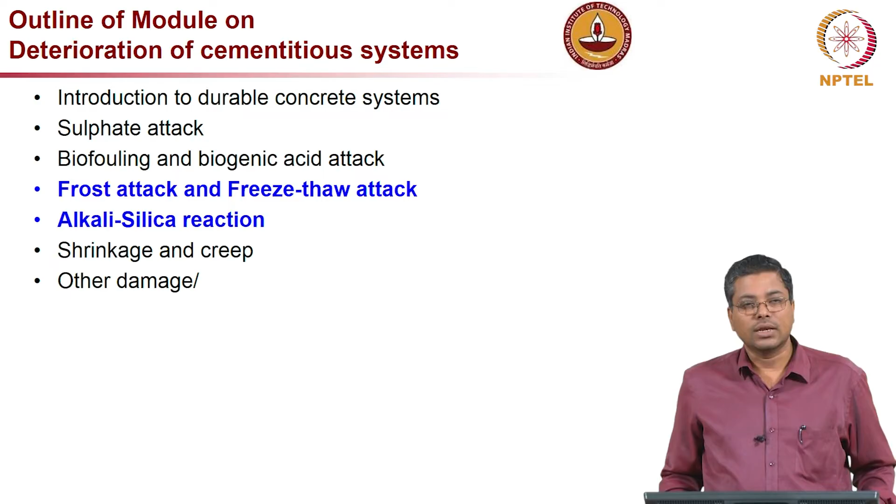Hi, this is lecture 7, which is actually the second lecture in the module on deterioration of cementitious systems. In lecture 6, we covered introduction for durable concrete systems, and then also sulphate attack and acid attack. In this lecture, we will cover frost attack and freeze-thaw attack, and also alkali-silica reaction in concrete systems.

To talk about frost attack, first we need to know where this actually happens. We have a lot of regions in our country where the temperature could be less than 4 degrees Celsius or ambient temperature. We define that as cold climate, and as you can see in this map, this blue region represents areas where cold climate is experienced. Even in other parts of the country you can see some hill stations, etc., where the temperature could be very low or can be defined as cold climate.

If you talk about the northern border, you even have places where the temperature during the night could be minus 35 degrees or even less than that. Eventually what happens is for construction purposes we get only a few months per year, like 2 to 3 months, to actually work comfortably in an outdoor environment.

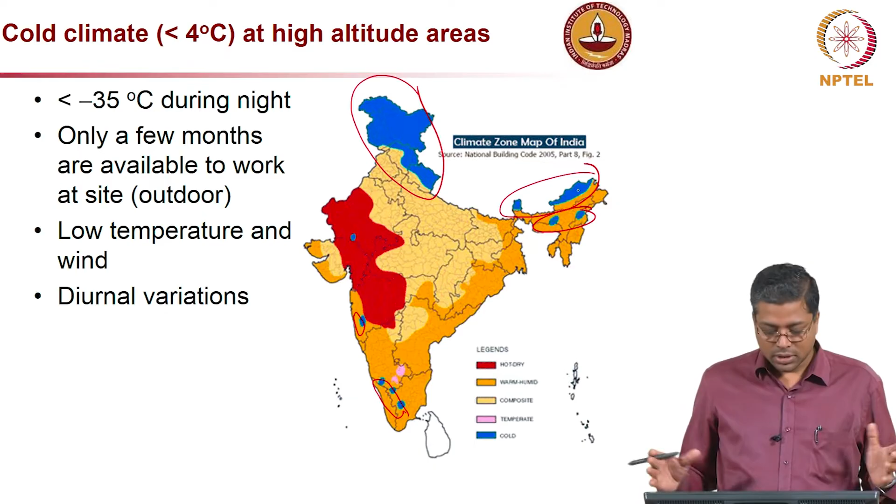And it's not only temperature, we also have to consider the wind chill factor. So these, and also you might have diurnal variations, that is daily variation of temperature. All these have to be considered when we talk about good quality concreting, and it is not very easy to construct during cold climate, because we ourselves won't feel much comfortable in that climate.

But we definitely have a need for good quality concreting in places like what you see on the screen, especially border regions, very high altitude regions with very difficult to reach terrains. How do we do good concreting in such cases, which is very important for our defense systems, because we might have bunkers and other facilities which need to be of good quality.

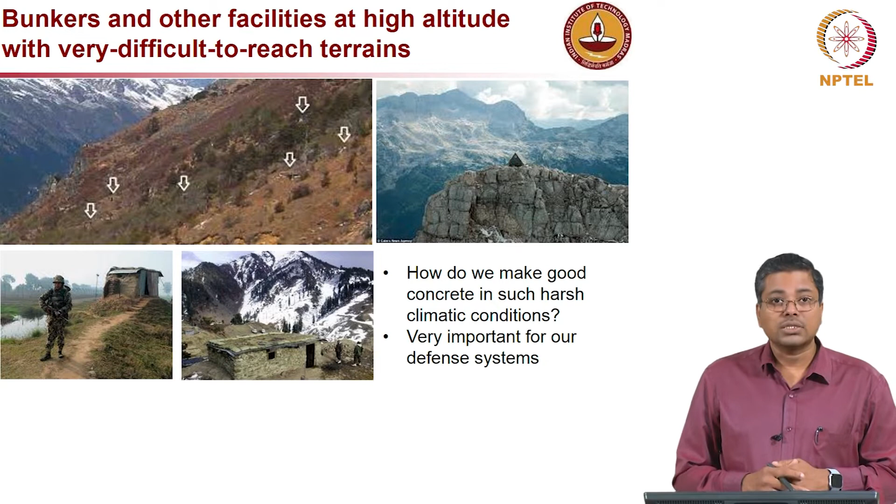So in this lecture we will focus on how to do good concreting in such harsh and very difficult to reach environments.

This picture shows a completely snow-capped region, and toward the center of the picture you see a black circle, where there is actually a home being built. I put this example here because that particular building took about 8 years to construct because of the harsh weather conditions. So it's very important to consider good quality construction practices, so that we can reduce the duration of construction from 8 years to maybe a couple of years.

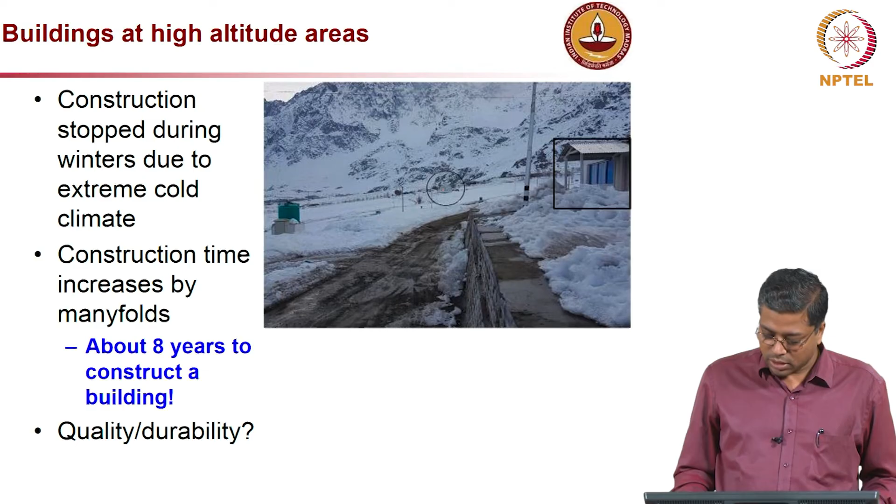We have to really think about this, and also another point is, even if we take 8 years to construct, how long will that particular facility last, can it be durable. All that also has to be considered, because first of all, in these conditions it is very difficult to construct. So our objective should be that when we do it, it should be of good quality, so that we do not have to go and repair in these difficult terrains and harsh climatic conditions.

Now this shows pictures of transportation systems, you have a bridge and an asphalt road which is heavily damaged because of moisture attack, and also poor quality asphalt, which leads to severe damage when vehicles run over them.

On the right side you have an image showing a wheel with metallic chains, which are sometimes necessary to ride these vehicles in a very harsh climate. What these chains do is, as the wheel rolls, the chain breaks the ice and makes it easy for driving on ice-capped pavements.

The picture on the bottom left shows, toward the center, a highway in that region, and all these have to be of good quality. How do we really achieve that good quality and long lasting performance?

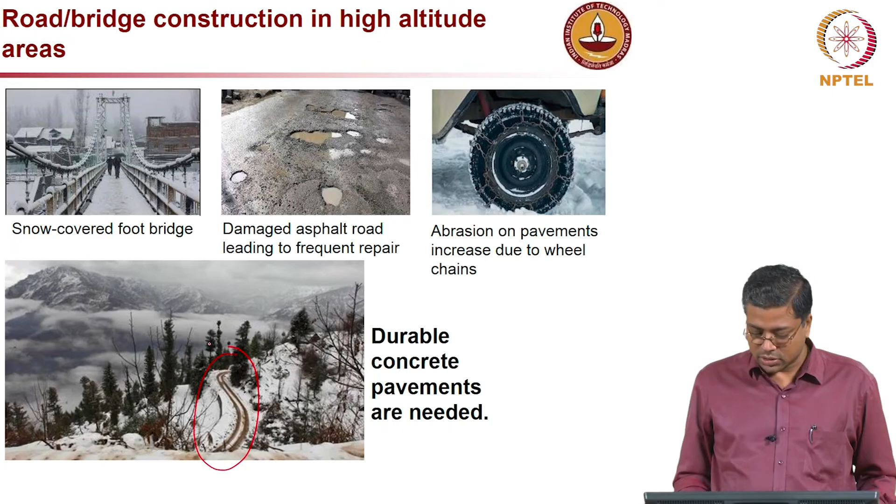Let me emphasize the point, construction itself is very difficult in these locations, and so if you do not pay attention to durability, the constructed facilities may not really last long. So we must ensure that the quality of construction is also very high, and once constructed it should last as long as possible.

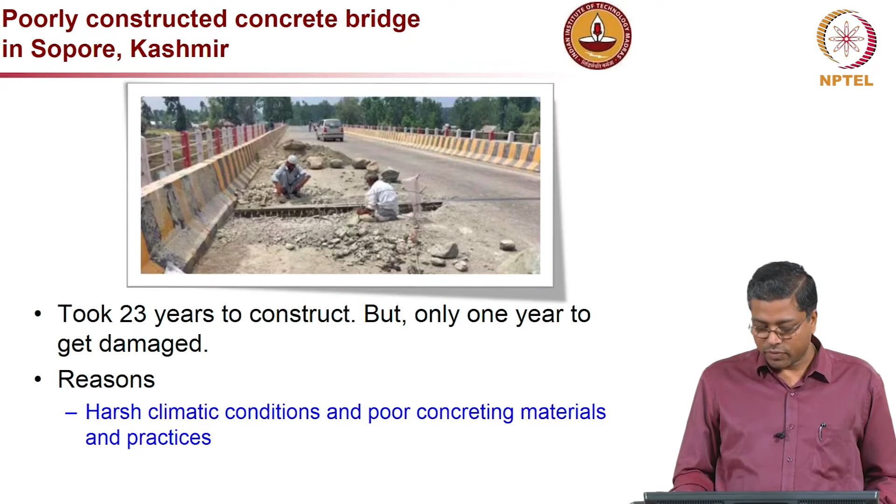Now, what are the reasons? Mainly harsh climatic conditions and poor concreting materials and practices. This is not acceptable, especially when we talk about difficult to reach terrains and harsh climatic conditions. The objective of concreting in cold weather should be that you do it properly, so that the structure does not need a lot of repair.

But we are having a lot of structures where repair is needed. Let us look at the remaining slides. I am going to talk about the various mechanisms by which concrete in cold weather conditions faces difficulties.

Now, in the fresh state or early state of concreting, there are 3 parameters which are important to consider. The concrete should set very fast or as early as possible, the early age compressive strength has to reach a reasonable level, typically 3.5 MPa, and thermal crack resistance is also very important.

All these can get affected when the temperature is very cold, and in the hardened state also compressive strength may not reach the required level if the temperature is very cold and concreting is not done with adequate measures. Other things which can happen in the long term are pop-outs, D-cracking, internal cracking, scaling, etc.

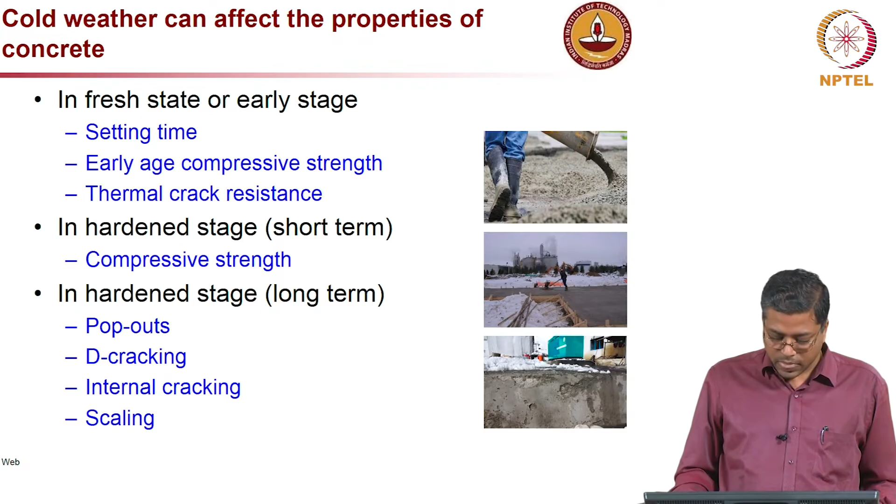We will cover all these in the upcoming slides. What are these different mechanisms? First, when we talk about cold weather or frost attack, there is ice formation which happens in concrete.

Where is this water which is used for mixing the concrete? If the temperature is very low, it will become ice, and as we know, ice formation means an increase in volume, about 9%, which leads to significant expansive stresses in the concrete. The first picture shows that 9% increase, and the second picture shows a system where there is not enough space available inside the concrete, which will eventually lead to cracking because of this ice formation.

The third picture shows how we can control this cracking scenario using the black circles, which are the air voids introduced, or entrained air voids, not entrapped but entrained air voids. In other words, air is added as an ingredient in concrete, and we typically use about 5 to 6% air by using some chemical admixtures, air entraining admixtures.

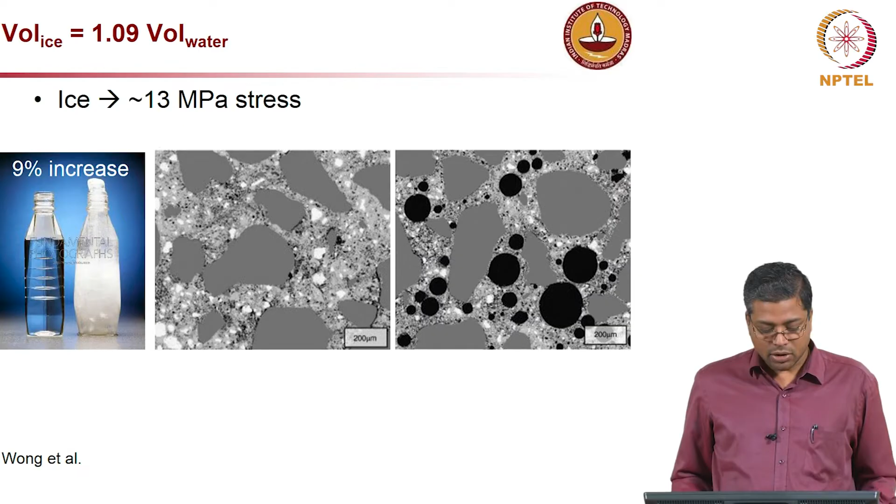So the idea is these air voids will help provide space for ice formation without inducing any expansive stresses. This is the main idea of how to handle cold weather concreting. Let us see some more details of this frost attack, which happens mainly at early ages.

Ice lenses are formed, or ice is formed at the surface of the concrete first, and as it expands, like you see in the picture on the top right, this wedge-like ice is formed, and as it expands it pushes into the interior concrete, leading to cracking. Essentially they end up fracturing the concrete or leading to cracking, and this can happen in the fresh state itself.

Also in the fresh state, when this happens, the mixing water is actually consumed, it becomes ice, so sufficient water is probably not available for the hydration reaction. What it ends up in is an irreparable loss of strength, which is very important, because if you do not get that strength, it means irreparable loss.

What it means is you cannot really gain it at a later stage, and the strength can decrease by about 50% if the concrete is frozen within the first few hours of placement, or before it attains 3.5 MPa strength. This 3.5 MPa requirement is given in most codes. So in cold weather concreting, we have to first ensure that the concrete gets 3.5 MPa, then protect that concrete further by ensuring adequate moisture and temperature. We will cover that later, but remember this number 3.5 MPa, it is very important.

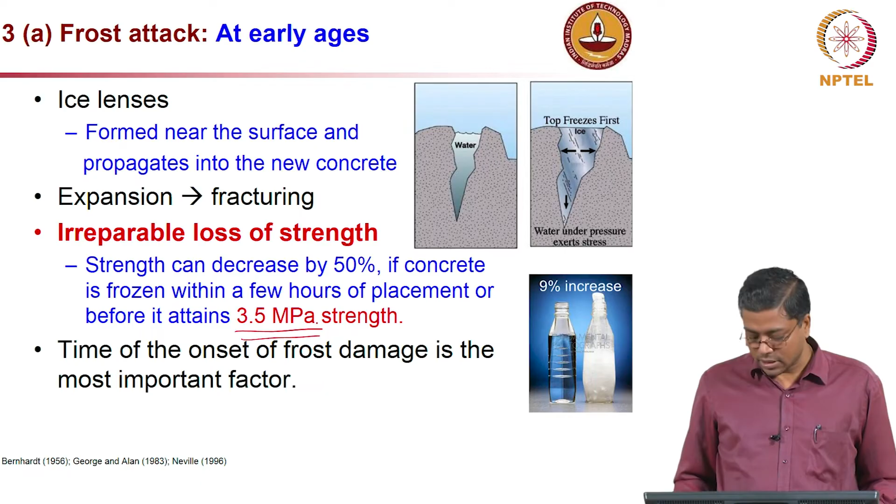Now, the time of onset of frost damage is also most important. That means if the frost damage happens after 3.5 MPa strength is attained, then we can still manage to get sufficient strength later.

Now let us look at delay in the early strength gain and reduction in the later age strength. This graph shows strength gain of about 40 MPa in 28 days at normal conditions. But the same concrete, when the ambient temperature is minus 4 degrees Celsius, gains only about 10 MPa strength in 28 days. So there is significant reduction in the strength.

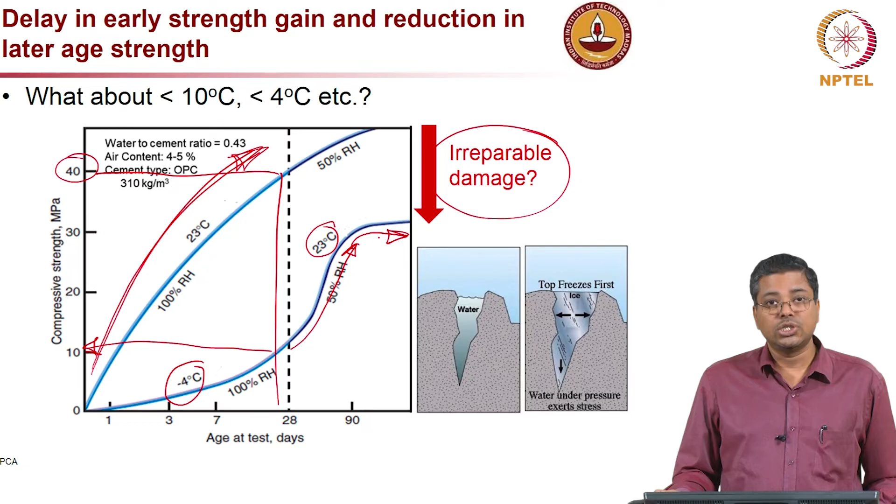Another important thing to notice is, after that, when the temperature is maintained at about 23 degrees Celsius, it still is not able to reach the strength of the other concrete which was exposed to 23 degrees Celsius from the very beginning. So there is a significant reduction in strength, which I am going to call irreparable damage. That strength you cannot gain, because after about 90 days the curve is almost flat, so there is no significant strength gain after that. You have an irreparable damage when talking about very low temperature. This is very important, and we will see in future slides how to take care of these issues in cold climate.

Now, ice formation in early stages, besides affecting strength, can also affect durability of concrete. If you look at this graph, the solid curve is the amount of ice formation, and the dashed curve indicates the permeability of the cement paste, or concrete. You can see that the permeability decreases as more and more ice is formed.

In reality, once this mechanism is over, if there is an increase in temperature later, the ice contained within the concrete will melt, become water, and that water might also evaporate at a later time. You will end up having more pores or voids, which leads to higher permeability, and definitely reduced durability in such cases. So this frost attack is very important to consider, not only for strength, but also for durability.

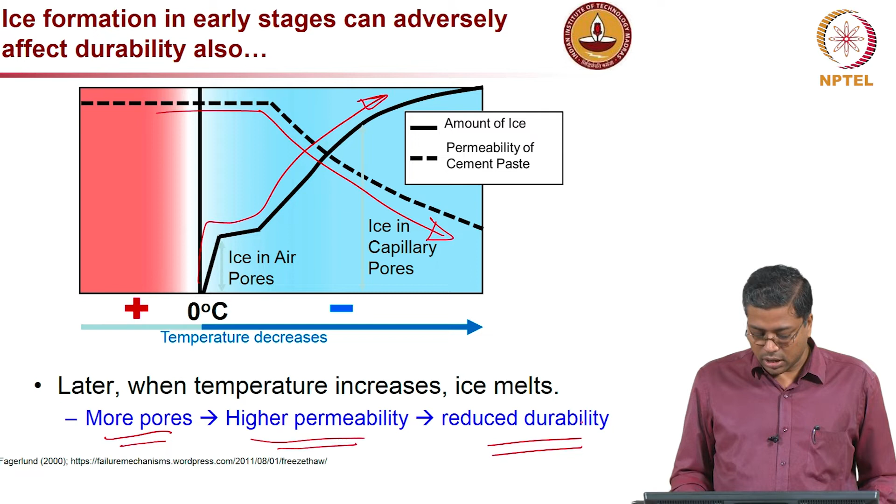Now, another effect is temperature differential induced effect. This schematic shows a mass concrete cross section of a concrete column. When the formwork is removed, the heat generated in the peripheral region is lost into the immediate cold environment. But at the core of the concrete, you still have reasonably high amount of heat. So there is a thermal differential temperature between the core and the peripheral region of the concrete, and because of this, the concrete will experience significant cracking near the peripheral region. The black areas indicate the cracked region.

The cracking might happen at the peripheral region, and if you have reinforcement near the cover concrete, you might also have corrosion related problems at a later stage. So you do not want the concrete to crack. How do you ensure this does not happen? By making sure the heat generated inside is not lost into the atmosphere. You have to maintain a good formwork and good insulation around the peripheral region, covering the concrete with a good blanket or other measures, which we will talk about later.

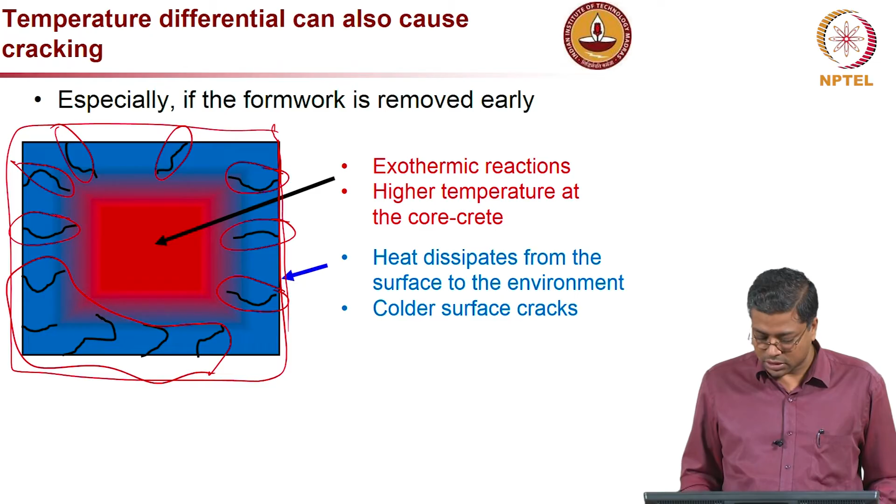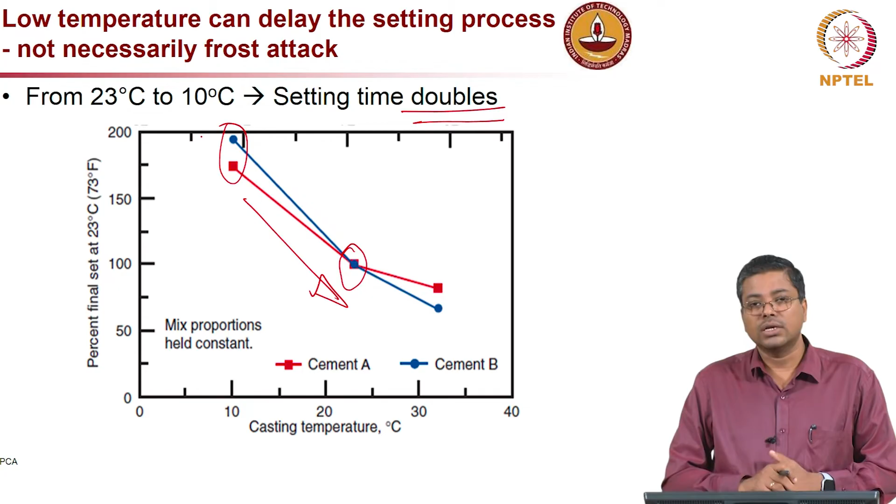Now, talking about a reasonably cold environment, say about 10 degrees Celsius, what happens to the setting time? You can see the setting time almost doubles. There is a 2 times increase in the final set as you go from 23 degrees Celsius to 10 degrees Celsius. This is a significant difference, so you have to consider various measures to ensure the concrete is actually setting fast enough. One way to achieve that is by using finely ground cement.

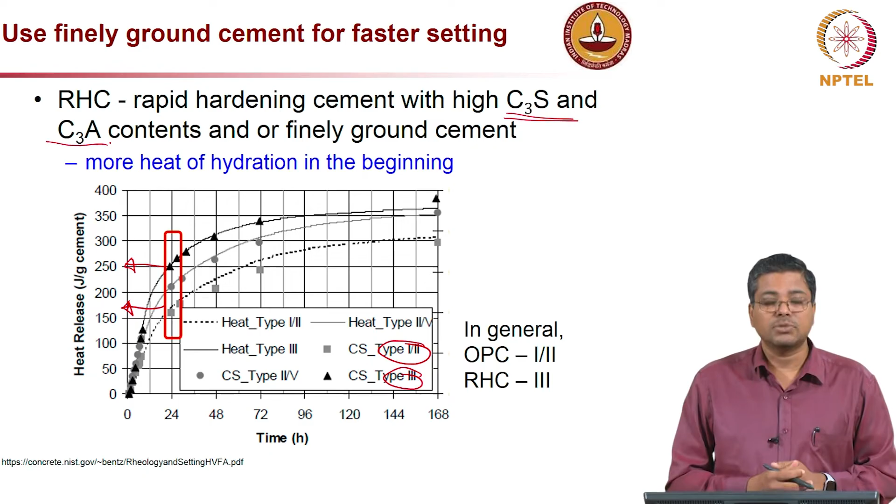This heat is very good or necessary for the hydration of the concrete to get cured better or in an accelerated manner. And also we can use high C3A and high C3S cement, which will actually help in making sure that there are more reactions, especially in the early stages of curing or hydration.

Now, this image or graph shows how the use of this rapid hardening cement can help in increasing the strength gain in the early period. So, let us look at here about 3 to 5 days. If you look at this, you can see that there is about 10 MPa strength gain or increase in strength when you compare OPC to rapid hardening cement.

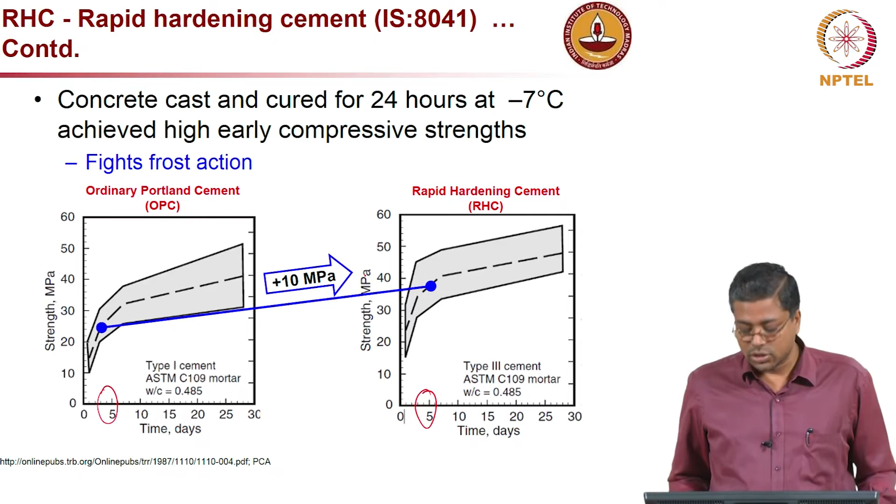So, definitely the type of cement you use matters, and the content, like if the cement has high C3A or C3S, and at the same time if it is finely ground, then definitely you can resolve some of the issues which happen at the early ages of curing. Okay, we also have accelerating admixtures.

Until now we were talking about the cement or the mineral admixtures, and how selection of cement can help in reducing the setting time and gaining early strength. Now let us look at accelerating admixtures, which can help in reducing the setting time and increasing the strength gain, especially at the early age.

And these accelerating admixtures also actually reduce the liquidus temperature, but not significantly, it reduces only by about 2 degrees Celsius. Let us see what this liquidus temperature is. It is the minimum temperature at which all the components of a solution can be in liquid state, and that means below the liquidus temperature the mixture or concrete will be partially or entirely solid.

So, we have to have some admixtures or some way by which we can ensure that the mixing water is available for reaction. I will come to that later, but before getting there, let us see this accelerating admixture. What are the three main categories? They use calcium chloride and accelerators which contain calcium chloride, and also non-chloride accelerators.

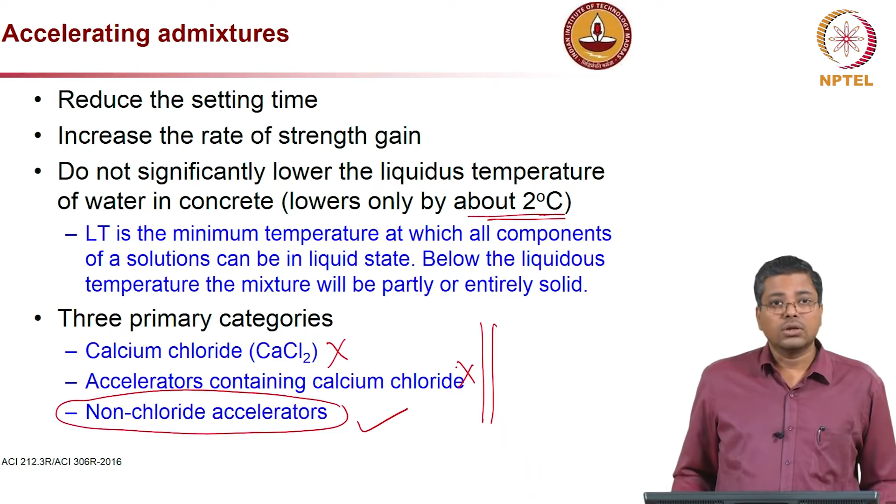So, I would prefer to use this non-chloride accelerator. Probably we may have to avoid the use of calcium chloride and calcium chloride based accelerators, because that might eventually lead to corrosion, which is not a good idea. So, it is better to go for accelerators without any chlorides in them.

Now, there is also another technology where the admixtures contain seeds of CSH, which function like a nucleation point for further reaction to happen and help in setting. So, what you see here is the CSH seeds and then cement grain, and then water, and these are also the CSH and ettringite needles, etc. You will see the needle shaped structure.

So, here the picture on the left side is without the CSH seeds, whereas here this is with CSH seed. Now, this will help in gaining the early strength and reaching 3.5 MPa. Let me correct this, this is M capital PA. So, that 3.5 MPa strength criteria is achieved, especially for cold weather climates. This is very helpful, because these seeds provide the nucleation point for the cement hydration. That is the technology.

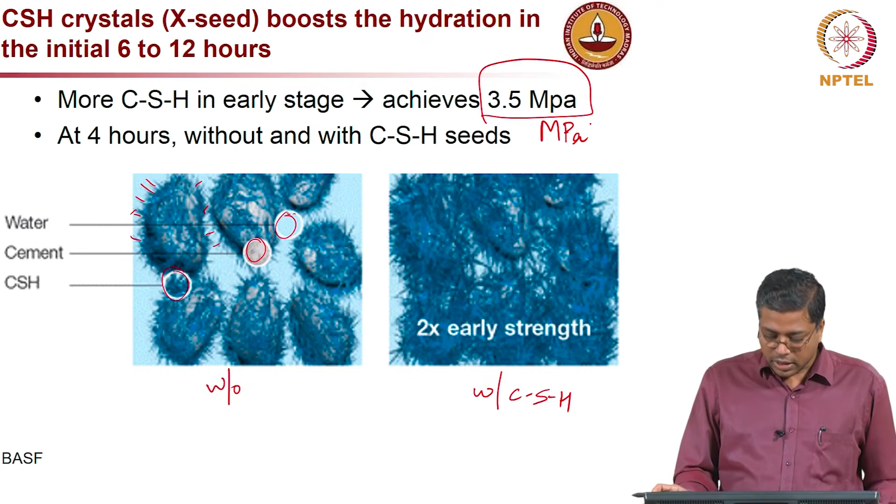And antifreeze admixture is another technology where the addition of these admixtures reduces the freezing point of the mixing water by about 10 degrees Celsius, from 0 it might go to -10. Because of that reduction you have more water available for the hydration reaction.

And you can see in this graph, when you have a control case where there is no antifreeze admixture, and the red one with antifreeze, you can see there is a drop from 0 to about -10. So that is the reduction in the freezing point of the two systems without and with antifreeze admixtures. So essentially what it means is, during cold weather or cold climatic conditions, you can have more time for construction. That means we can pick a time, and even if the temperature is down to -10, you can still do concreting with this admixture.

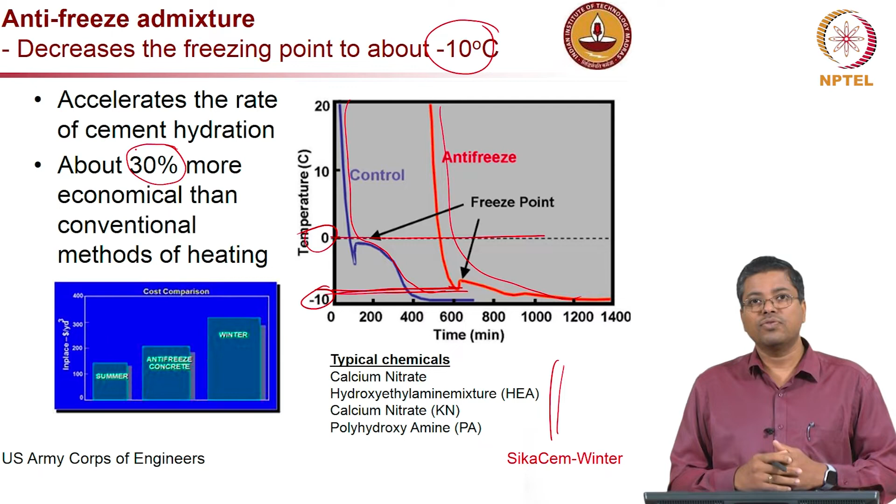These are some examples of chemical families which are used, and people have done studies on how economical this methodology of using chemical admixtures is for mixing concrete. Studies show there can be about 30% savings instead of going for heating or other conventional methods of cold weather concreting. So just use a chemical which is added to the concrete and which can reduce the freezing point of the mixing water. That is the idea here.

Now, how should concrete be protected until the specified strength of 3.5 MPa is attained? That means in the very early stages of concreting. First, we have to ensure that sufficient moisture is available. How do we ensure that? By preventing evaporation of moisture from concrete, because when you mix concrete based on your water cement ratio, you already have the amount of water required for hydration. All we need to do is prevent it from getting out of the concrete, that is, prevent evaporation.

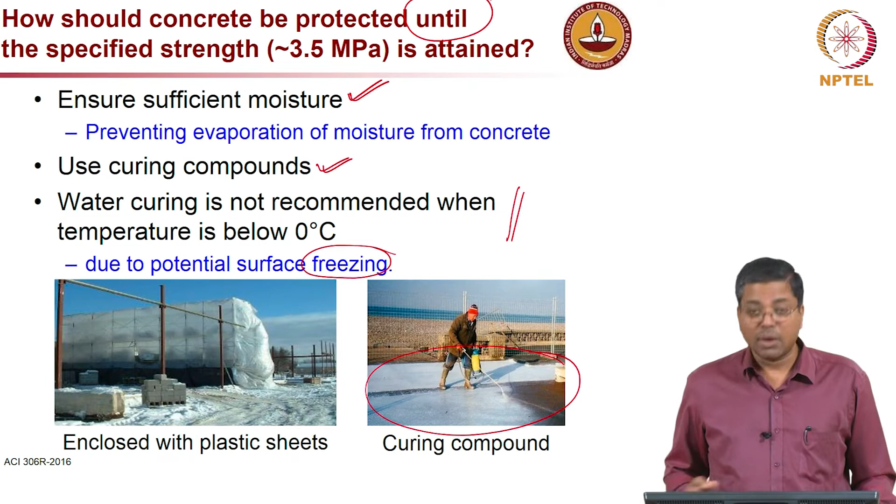We can also use curing compounds to prevent moisture loss from the surface. One important thing to note is that when the temperature is in the freezing range, less than 0 degrees Celsius, it is not recommended to use water curing, because that water will stay on the surface of the concrete and eventually freeze, leading to further damage. So water curing is not a recommended idea. The main thing to do is protect your concrete structure with a plastic sheet or something similar so evaporation does not happen, or provide a membrane, which is basically a water curing compound.

Now, how should concrete be protected after the specified strength is attained? That is, slightly after the very early stage. How do we ensure this? Mainly by ensuring sufficient heat is available, or that the heat coming from the concrete is not lost into the environment, and also by providing external heating to the concrete. In this slide we are talking about external heating, and direct heating of concrete should not be allowed.

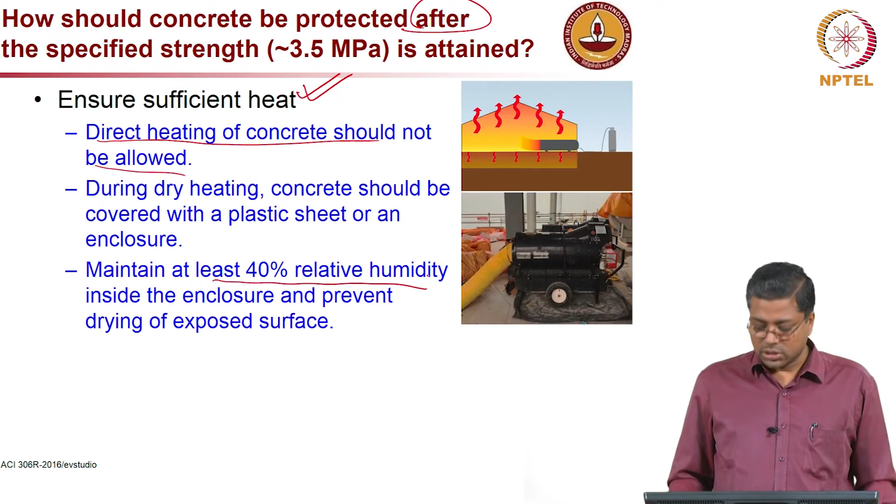As you see in the picture on the top right, there is a flame and an enclosure on top of the concrete surface which provides hot air uniformly around the concrete surface. Uniform heating is essential, not direct or localized heating, and you should maintain at least 40% relative humidity inside the enclosure, because if you keep it too dry, the concrete will dry out and not have enough moisture for hydration, especially near the surface.

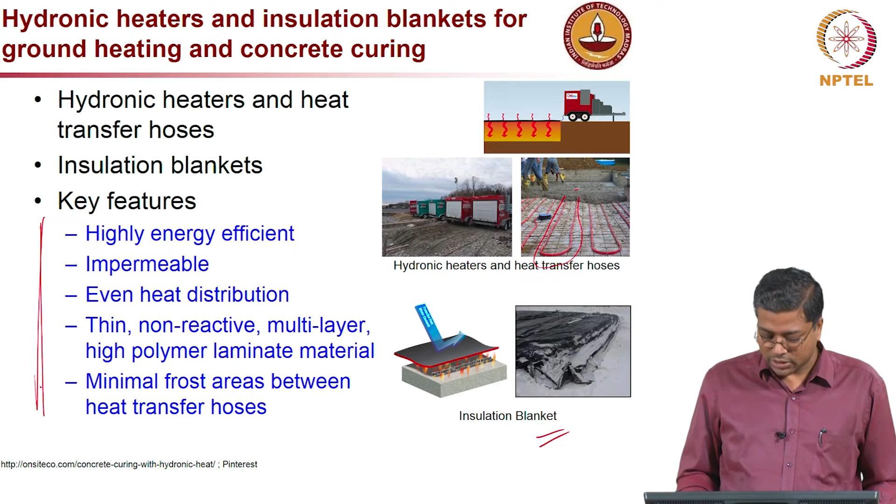So if we do all this with proper planning and arrangement for protecting, the protecting of concrete is also very important. It is not only the materials which you put, like finely ground cement or cement with high C3S or C3A, and chemical admixtures like antifreeze chemicals or accelerating admixtures - that is all fine on the material aspect. Then you have to place the concrete properly and make sure that in the initial stage you have sufficient moisture available as water, preventing frost attack, and make sure the 3.5 MPa strength is gained, and then protect the concrete by preventing further moisture loss and heat loss.

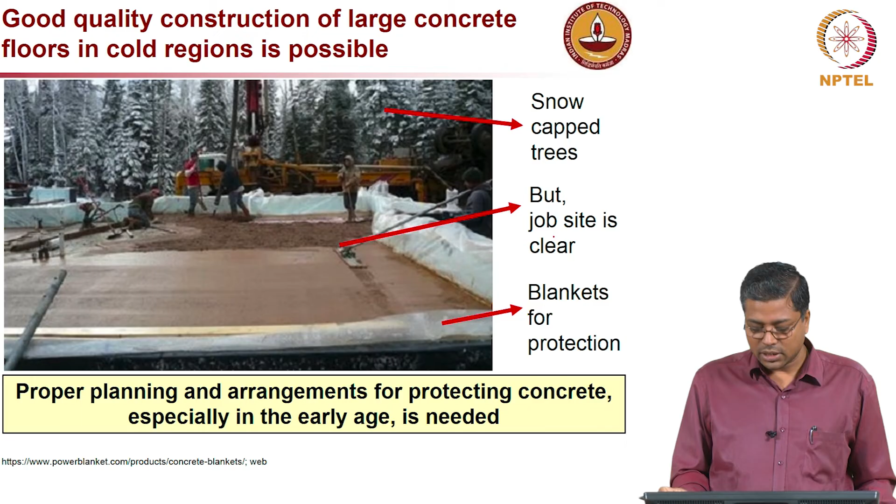If you do all these things, I think we can really have good quality concrete like we see in normal climatic conditions. Now, freeze-thaw attack, if we talk about later ages, it happens. So, when the temperature of the hardened concrete is below 0, the water does not all freeze immediately.

The freezing point also depends on the size of the pores. Water in the smaller pores needs less than 0 degree temperature to freeze. For example, water in 10 nanometer pores will not freeze until -5 degrees Celsius. In 3.5 nanometer pores, it will not freeze until -20 degrees Celsius, and gel water will not freeze until -78, since that is much smaller pores.

So, you can see this. At the same temperature, what it means is there could be some water which is already frozen and some which is not frozen, depending on the size of the pore where the water is staying or occupying.

As the water freezes, it dilates and expands and compresses the remaining water in the same pore. During this process of dilation, it pushes the water, and that pressure is relieved if there is sufficient pathway available for that water to move into another pore or void. If no voids are available in the near vicinity, then the pressure may build up, which eventually leads to cracking or rupturing of concrete.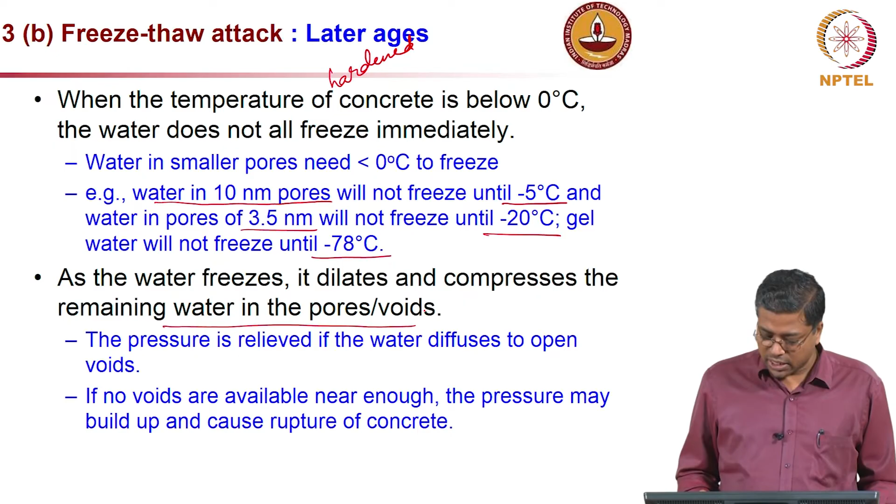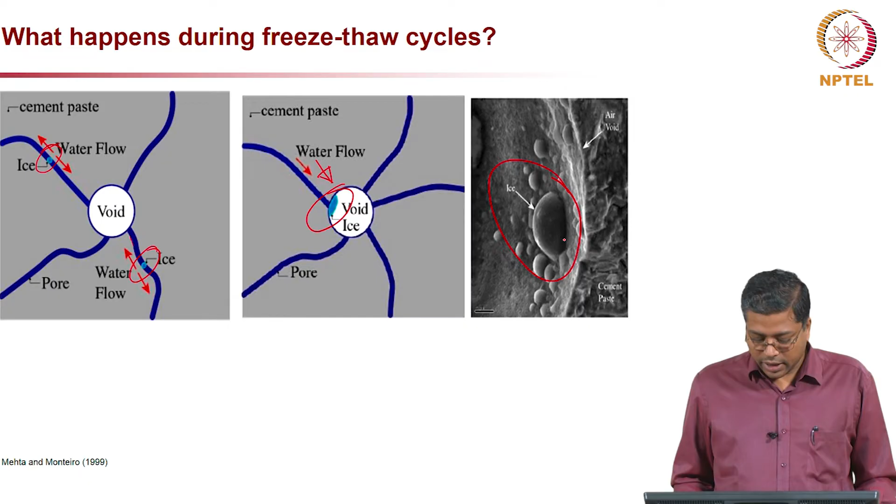So, if you have an air void, then it will not exert pressure, but if you do not have an air void, then it will exert pressure and lead to cracking.

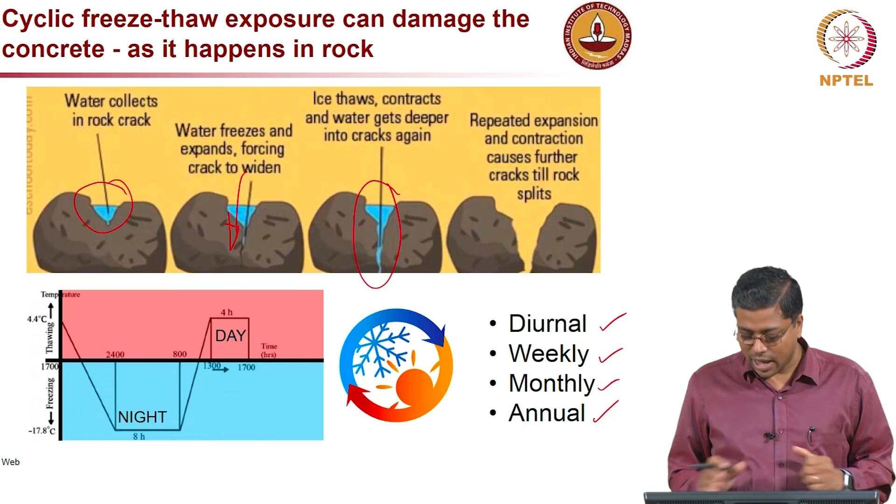So it is the number of cycles which matters. If the number of freeze-thaw cycles is more, then you will have more and more damage induced into the concrete.

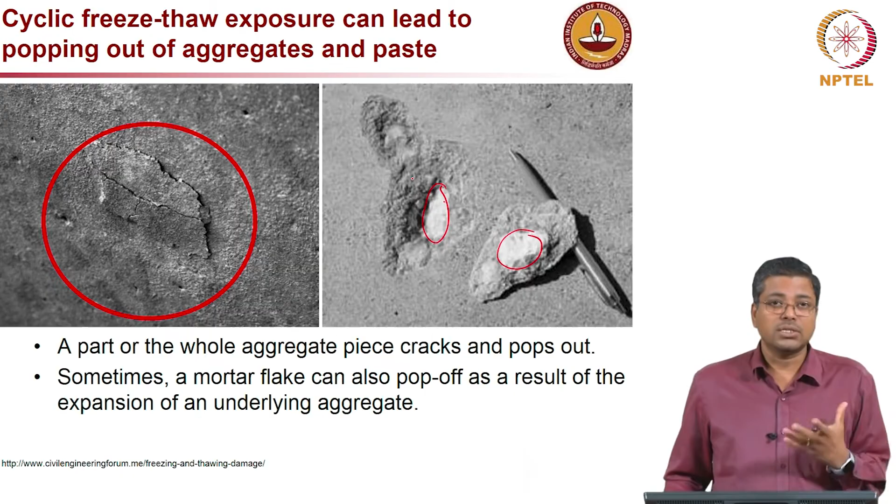Now, cyclic freeze-thaw exposure can also lead to popping out. As we discussed, this ice will form inside the concrete, it will push the cementitious system and it will lead to cracking and popping out. As you can see on the picture on the left, it is a slight popping, it is about to pop, and then on the right side you can see that it is completely popped, and then you can very clearly see the same aggregate is also cracked. The pressure is so much that it can also crack the aggregate.

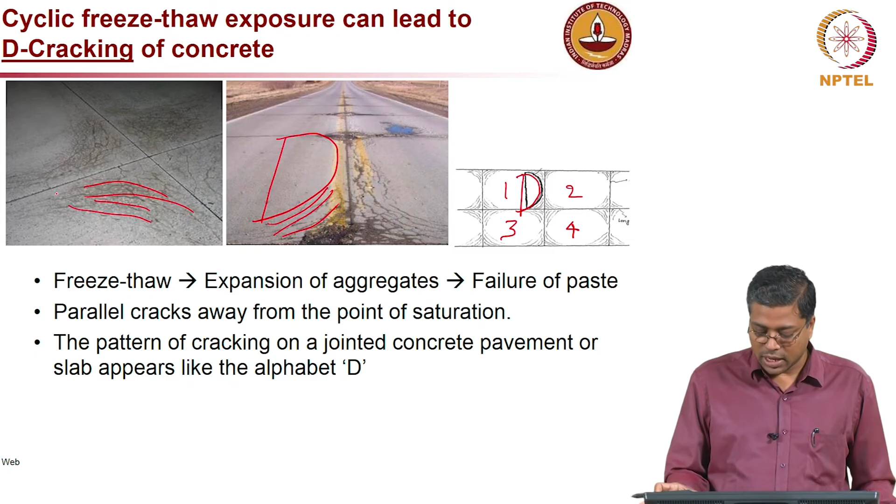Then parallel cracks form away from the saturation points. You can see these parallel cracks which are actually happening, away from the joint, which is the saturation point. This cracking is widely observed especially on exterior concrete structures, exterior elements such as roads, which are directly exposed to the environment.

Water saturation and cyclic freeze-thaw exposure can also cause internal cracking, especially in cases where the concrete is in direct contact with free water. Because of capillary suction, the internal concrete absorbs or sucks in water from the immediate environment, and when the temperature decreases, that water becomes ice, not at the near surface, but inside the concrete, leading to multiple micro cracks, or maybe a larger crack.

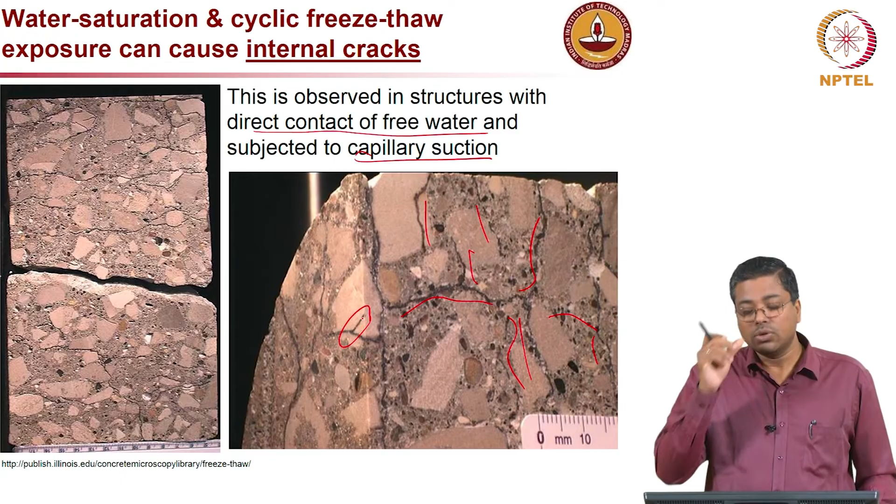Significant cracking you can see in both images, even the aggregates are cracked. All this expansive behavior, the stress induced because of it is very high, which leads to cracking of the aggregate and eventually of the entire concrete system.

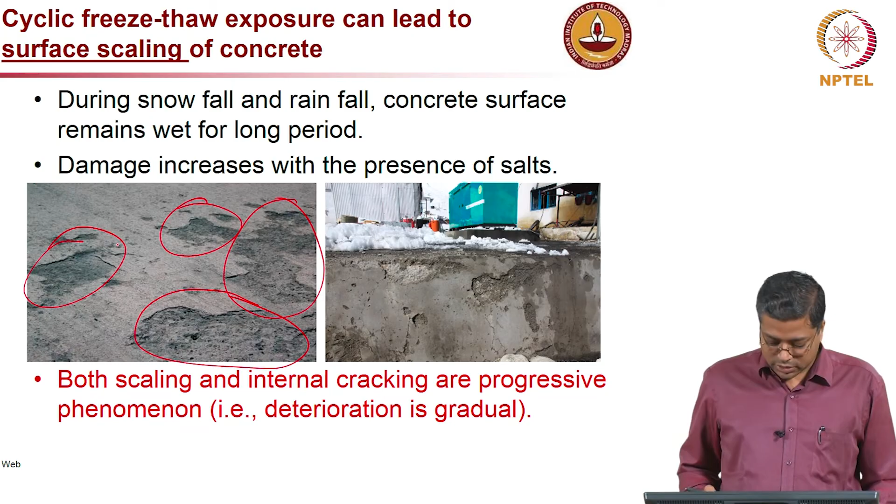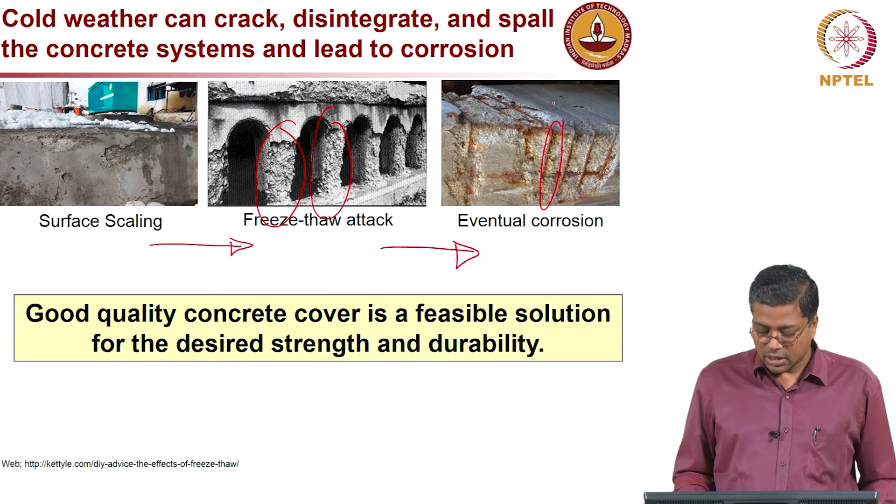Eventually, surface scaling leads to multiple deterioration, because new surfaces get exposed, leading to significant loss of material, as you see in the picture at the center. Eventually the entire concrete cover can be lost due to this kind of freeze-thaw attack, and once the cover is lost, the reinforcement gets exposed and corroded, which definitely affects the structural capacity of the system.

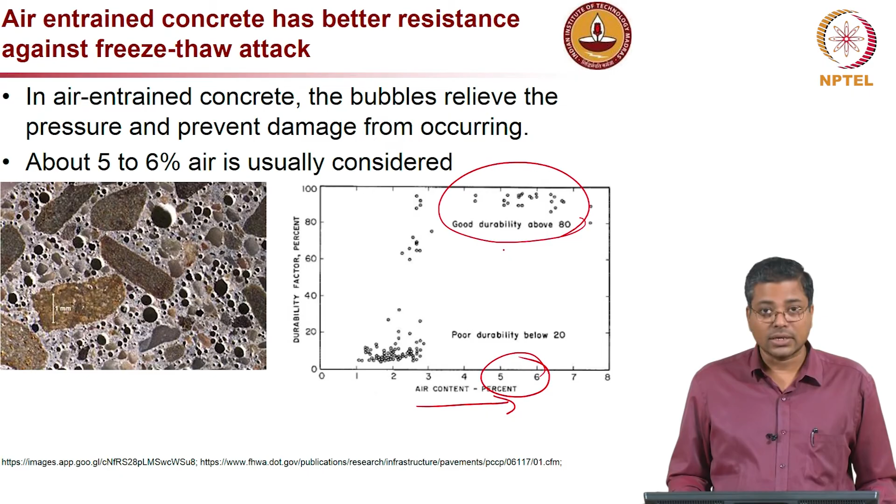Now another damage mechanism is alkali-silica reaction. ASR is the abbreviation; some people also call it AAR, alkali aggregate reaction, but because most aggregates are silica rich, we call it alkali-silica reaction. It is a chemical reaction which happens in the presence of moisture, between the active mineral constituents and the alkali hydroxides present in concrete. So we will see what happens when you have water, alkalis and reactive aggregates; this combination leads to alkali aggregate reaction or alkali-silica reaction.

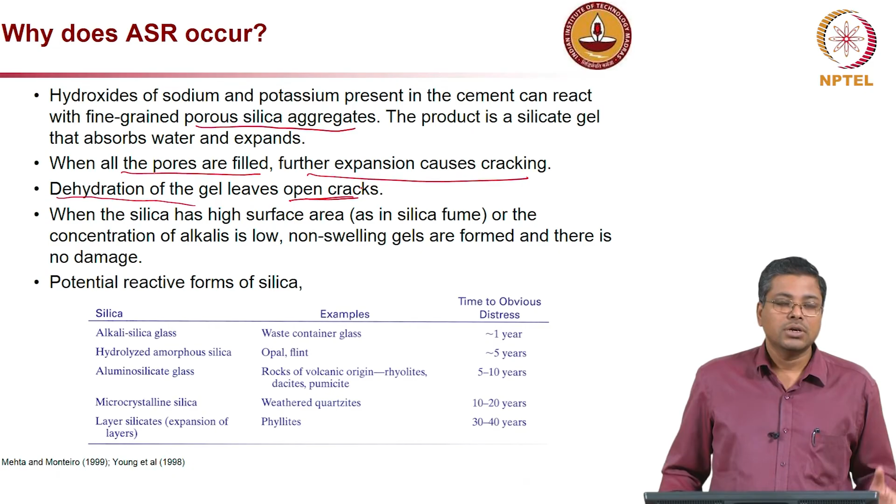Now, once there is a dry environment and all the moisture evaporates, it leads to dehydration of the gel, leaving open cracks or voids in the system. Later, more moisture can enter, allowing further reaction and continued formation of more gel, leading to significant cracking. Now, when silica has high surface area and the concentration of alkalis is low, you will have some non-swelling gels which may not induce significant damage.

So let us look at which type of silica can be selected. In this table, as you see on the right side, it indicates what the expected life is for a structure if you use a particular type of silica. As you go down the table, you get better and better aggregates.

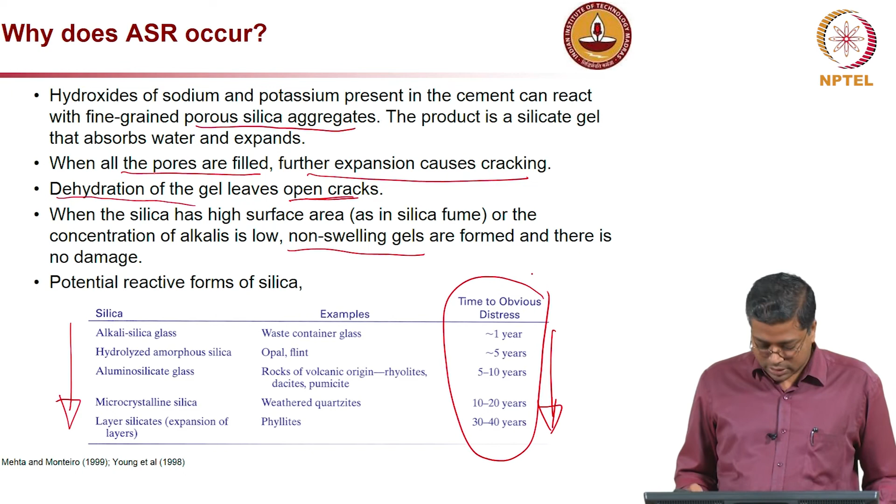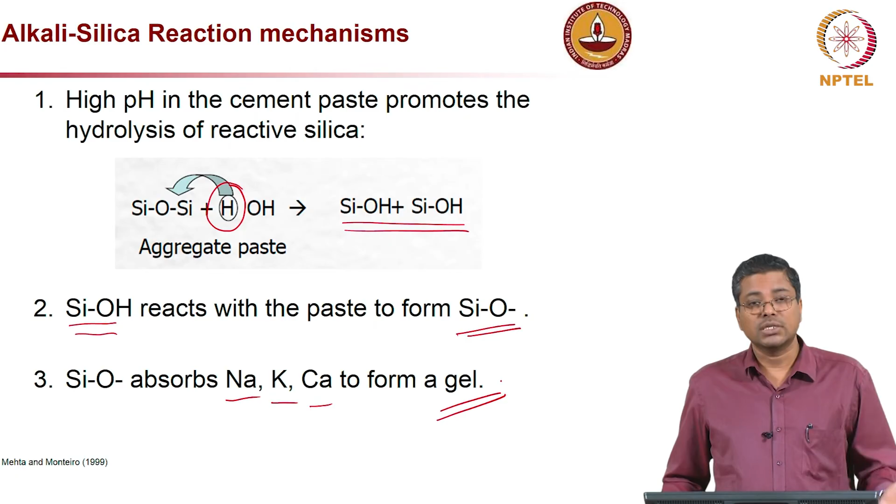Now, what is the reaction mechanism? The high pH in the cement paste promotes the hydrolysis of reactive silica, forming SiOH bonds. This SiOH bond reacts with the paste to form SiO, which further reacts with sodium, potassium, and calcium to form a gel. This is the gel we call ASR gel, which is expansive in nature, or sometimes absorbs moisture and expands.

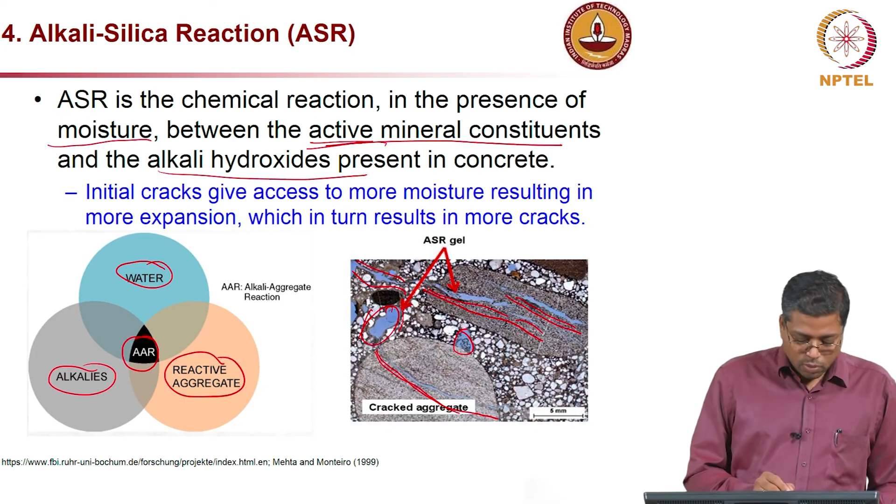So as I showed earlier in the bottom left picture, water is also a key factor. If you can keep the structure very dry, you may not see ASR induced reactions.

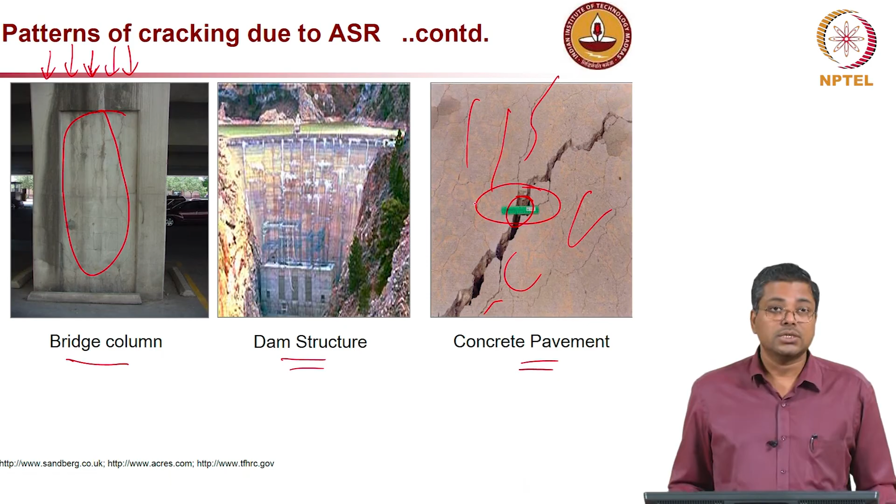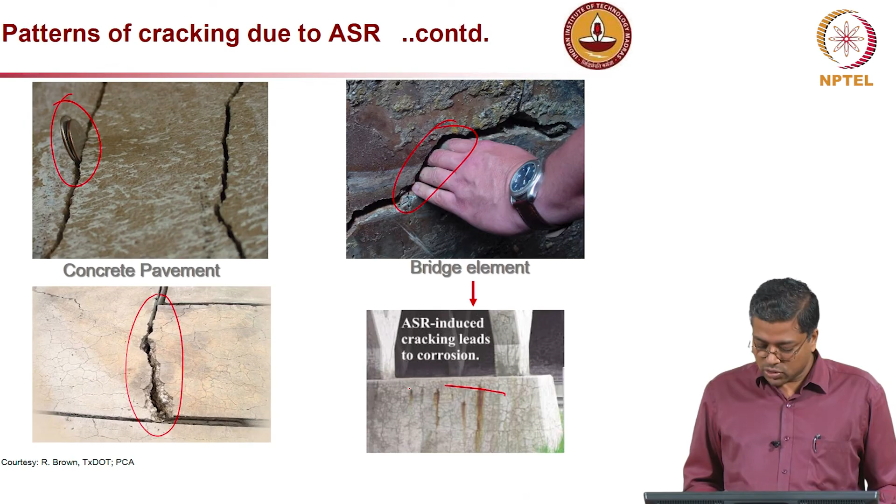There are other examples like a dam structure and concrete pavement, where also you can see significant map cracking. These are all due to ASR induced cracking. You can see the width, this is at least about an inch wide crack there, and these are additional examples showing how significant this cracking can be. On the left you can see a coin, and fingers inserted into the crack, and also a significantly wide crack on slab elements. The main point is all these cracks will help other deleterious elements enter the concrete and eventually lead to corrosion of the reinforcement inside, which is a big problem later.

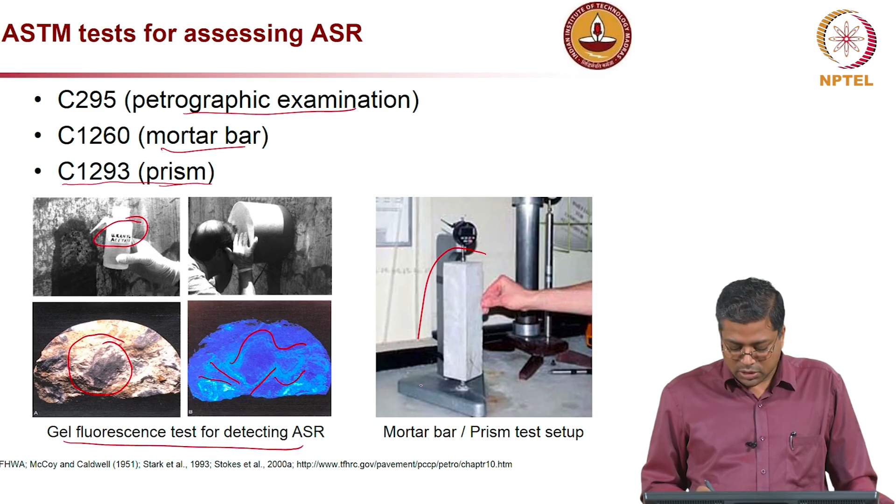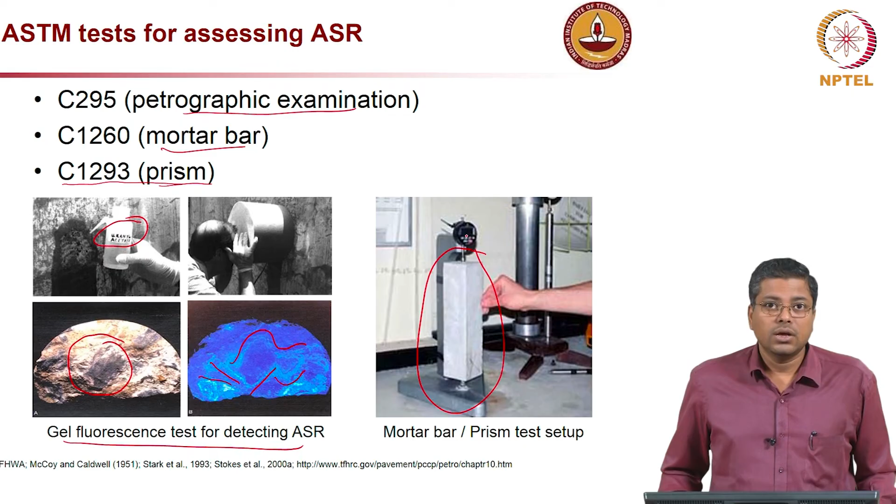There are also other tests like the mortar bar test and prism test. The mortar bar test looks at the cement paste or mortar system, not the large aggregates, but there is also a test for concrete prisms. The picture shows how these tests are done: a prism is made and we look at the change in length. If it is expanding, there will be an increase in length, which tells you how severe the ASR reaction could be.

Now, let's say you've already finished construction of a structure and you find there is an ASR type problem, how do we mitigate that? I am going to show you multiple ways by which people have tried impregnating the structure with lithium, which so far is said to be the best technology. The first is by spraying lithium onto the concrete surface.

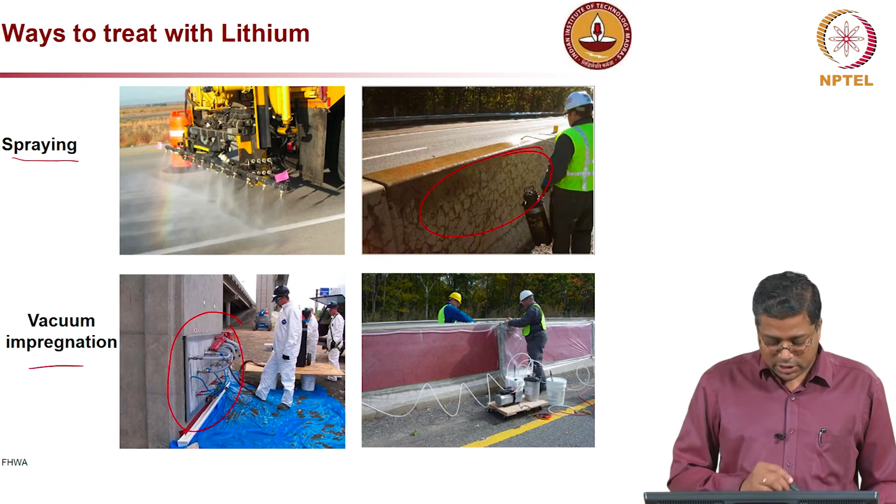These are concrete roads, and here is a barrier. Vacuum impregnation is also applied. In the first method you spray it, and in the second, vacuum impregnation, you create a vacuum pressure to suck the lithium solution into the concrete surface, but this is probably more expensive and not very easy. There are also electrochemical methods where you apply a voltage to drive lithium ions into the concrete. For this particular project, with just 2 concrete columns, it took almost 8 weeks to impregnate sufficient lithium into the concrete.

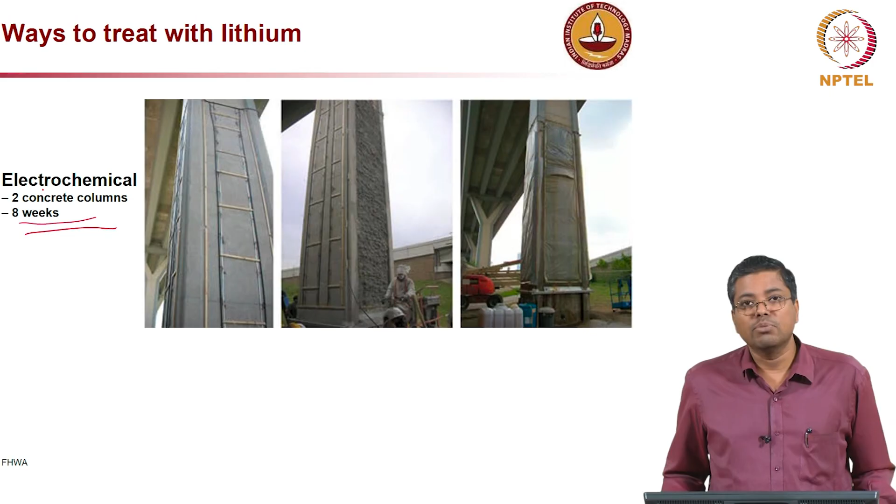So it is expensive, but sometimes you might end up in situations where it is very important, and you cannot really look at money, but need to protect the structure.

Now, what is the idea behind this lithium treatment? If the ratio of lithium to sodium plus potassium concentration is greater than 0.74, then the expansion is minimum. This is the typical ratio requirement for how much lithium needs to be impregnated. The typical dosage is about 4.6 liters of 30% lithium nitrate solution for every 1 kg of sodium oxide equivalent in the concrete.

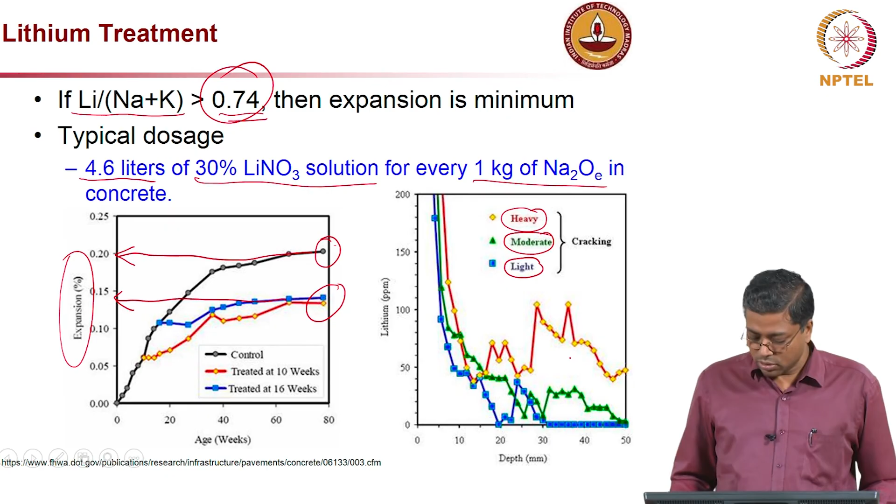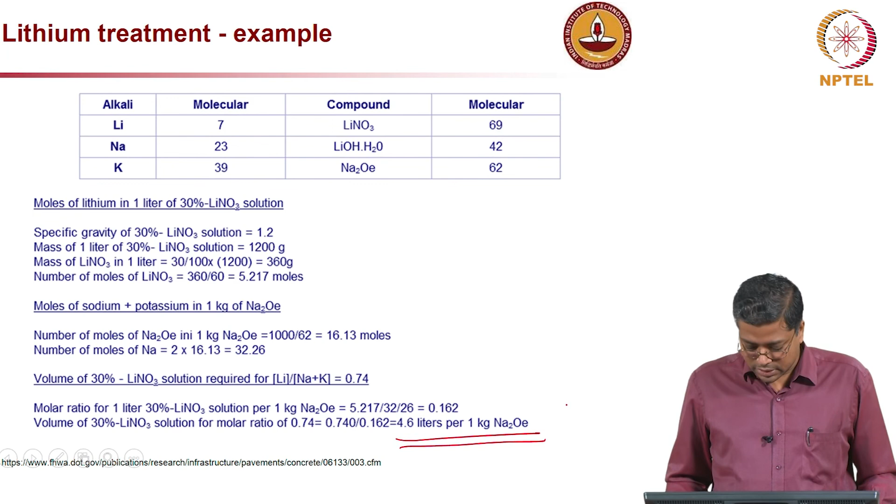The graph at the bottom left shows the difference in expansion between a control system with no lithium treatment, and lithium treatment for 10 weeks and 16 weeks. There is significant reduction in expansion, from about 0.2% to less than 0.15%, about a 30% reduction. Also, depending on whether you have heavy, moderate, or light cracking, the amount of lithium requirement is apportioned accordingly. This example shows how the 4.6 liters per kg of sodium oxide equivalent figure is derived. You can go through this in more detail later.

To summarize, we looked at both cold weather concreting and associated issues, and ASR. In cold weather, we discussed how cold can affect the properties of fresh and hardened concrete, and that finely ground cement, cement with high C3S or C3A content, and chemical admixtures like accelerators or anti-freezing chemicals can help enhance the setting time.

Air entraining admixtures can also help; air entrained concrete performs better than normal concrete. The concrete should achieve 3.5 MPa strength, and further protection is essential by ensuring sufficient moisture level and sufficient heat are maintained. Then the concrete will continue to develop further strength.

In terms of ASR, we saw that it is the reaction between alkali content in the cement and reactive aggregates. Different types of aggregate have different levels of reactivity, so you have to choose low reactive aggregates so that ASR related problems do not happen. ASR can be identified based on the crack pattern, typically map cracking, and it can be controlled by lithium treatment, though this is not easy, it is time intensive and expensive.